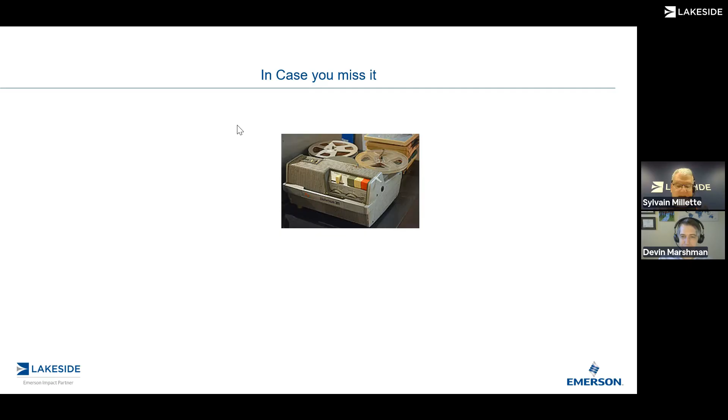Bit of a safety moment. I know we kind of passed the equinox back in March 20th or 19th, and we all survived here in Southern Ontario. We survived the eclipse, thank God.

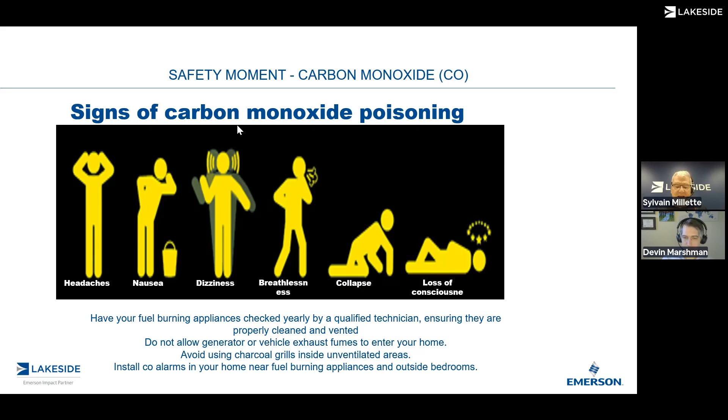One of the things to always follow: they always tell you to change the batteries for your smoke detectors, but as well as your carbon monoxide detectors. In my house, I have four carbon monoxide detectors, one on each floor including the basement, and one in the garage. It's important because I actually have my winter barbecue in the garage, so I barbecue in the wintertime with the door open, but I do have a carbon monoxide detector there as well, just in case. So be very aware of that.

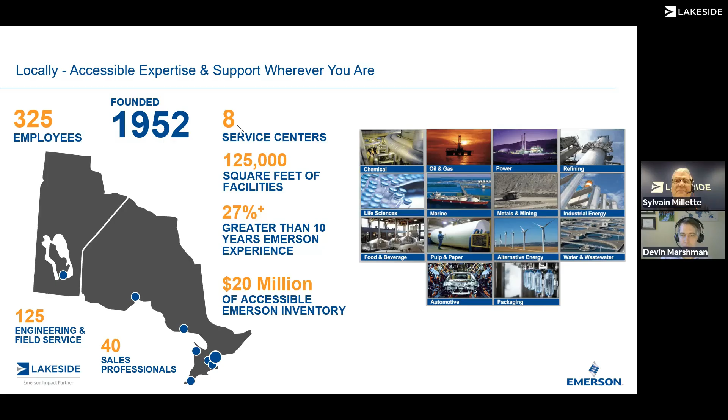It's a huge facility, 125,000 square feet - it's very big, I can't remember if it's in the millions or thousands. And we are part of the Emerson Impact Partner, as is Spartan as well. Our territory at Lakeside is most of Ontario, from just this side of Kingston to the Manitoba-Saskatchewan border and parts of Nunavut. Spartan Controls takes care of the western side from Saskatchewan to BC and most of the Northwest Territories. So we do work together a fair bit on some of these endeavors.

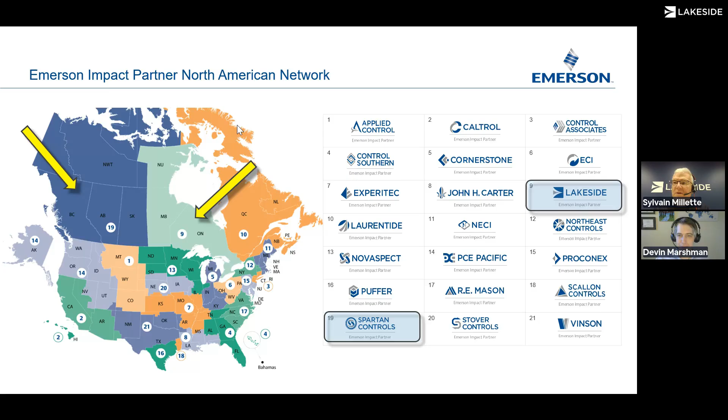So what are we going to talk about today? We'll explain a little bit the relationship - I've already hinted that we're both Emerson Impact Partners - and then we're going to talk about what advanced process control is, and most importantly, why.

We're going to deal with some of the applications that Spartan has developed, Spartan Pro Solutions, specifically grinding, flotation, and thickener. There are many other applications, but we've limited it to what I call the 80-20 rule - the bread and butter, where you probably get the most out of your money. Then we'll talk about specifics, and where to begin in terms of the opportunities available.

We'll talk about the timeline to actually implement these, and obviously the most important part - sustainability, how do we maintain the system to make sure it does not degrade over time? Yeah, sustainability, I know.

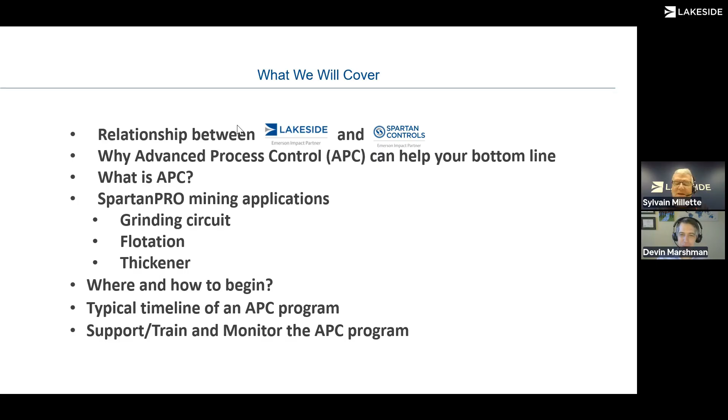As I mentioned, Lakeside and Spartan Controls are both Emerson Impact Partners. We are the exclusive reps for Emerson process automation products within our territories, but we also have an agreement together, so we rely on each other. Sometimes we have expertise that Spartan does not have, and Spartan has expertise that Lakeside doesn't have, so we lean on each other to bring more complete offerings to our customer base.

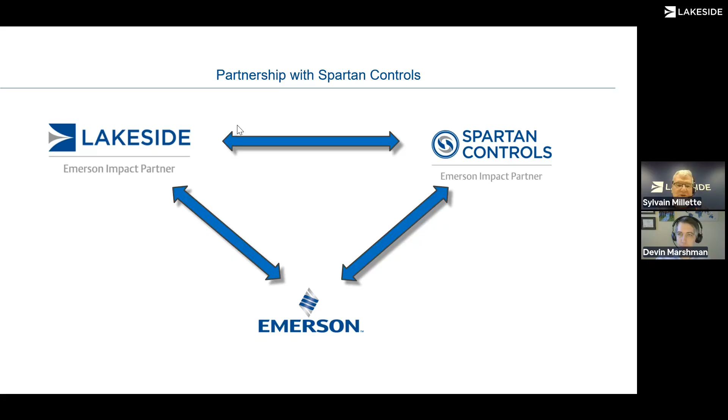For the Spartan Pro Solutions, today we're going to talk about the mining application, but there are Spartan Pro Solutions for all these industries out there - oil sands, which we don't have here in our territory, pulp and paper, the lime kiln application, power and utilities, and so forth. This is just a small subset of the solutions available to the industry.

So Devin, here's what we're going to talk about today - hard rock applications, so AC/DC or maybe Pink Floyd, a hard rock application. We've got Spartan Pro SAG mill - SAG stands for semi-autogenous grinding - and the ball mill. We've got soft rock applications too, and then more common applications, we've got flotation and thickener.

Today we're going to talk about these three groups of application. Devin, correct me if I'm wrong, but I think these are probably the most common for mineral processing. I'm not talking molybdenum or copper or gold or nickel, but these are the more common types for all mineral processing. Am I right in saying that? It definitely is in Western Canada. There are variations, lots of leaching and electrowinning circuits out there for sure, which we're not going to cover today, but we can be happy to talk about at a later date.

Now, Spartan Controls has a tremendous amount of experience here. So you can see it's a bit of an eye chart. But maybe Devin, I'll let you speak to this because obviously I'm not completely familiar here. I'll let you speak to this in terms of the benefits that have been achieved by advanced controls.

Yeah, you bet. So I won't talk about it line by line or anything, but really one of our mandates is to work with customers to set up advanced control applications that help their process and save them money, make them money, essentially. So we've been doing this in the mining industry for over a decade now. Most of these applications are kind of these big three that we're talking about today: the grinding circuit, flotation, and thickeners. But lots of other solutions in there as well.

Now, the exact values that customers are saving aren't listed here. Some of that's proprietary. The biggest application I'll mention, or the biggest payback that we've achieved for a customer, is upwards of $36 million a year. That's going to vary based on your mine size, based on your mineralogy, based on your current operating conditions and where you set the bar. But generally, there's some pretty high paybacks available for these applications.

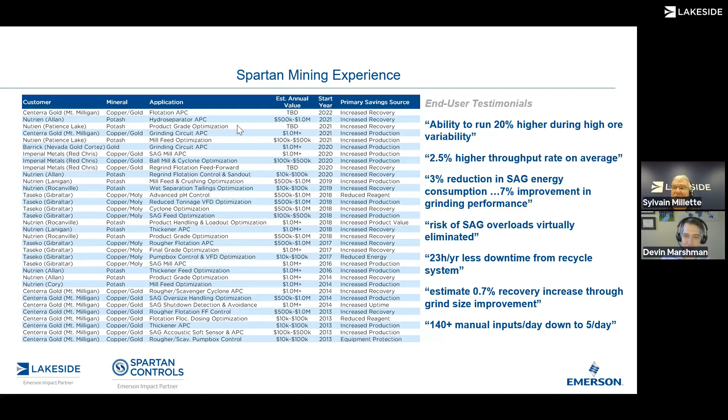And what's a sort of payback period from the moment of implementation, commissioning, and then operation, what kind of payback are we talking about? We're definitely talking months. So that's not years. And weeks in the case of, or days in the case of the $36 million - no, kidding, but it's pretty quick. That is amazing.

So why am I showing you these depressing slides? Well, basically, advanced controls is there - we'll talk about this a little bit later on - to be able to maximize your throughput, but also maximize your extraction of your process. So you get the best of both worlds to be able to weather these kind of fluctuations, which are inevitable for mineral prices as well.

Another reason why, at least in Lakeside's territory, here's kind of what we have right now: over 16 active gold mines, and one in Manitoba, and there are 13 more potentially active and in advanced exploration stage within the territory, and you can see the rest here. So the mining industry is huge, and we're not even talking about the Ring of Fire here, which is the chromite deposits up north, which are still happening. I'm not exactly sure where we are with that, but we're not even talking about it. So mining is a huge part of our customer base, huge part of Ontario's economy. Something that we need to make sure we capture and make sure that we are there to support and actually be as efficient as we can.

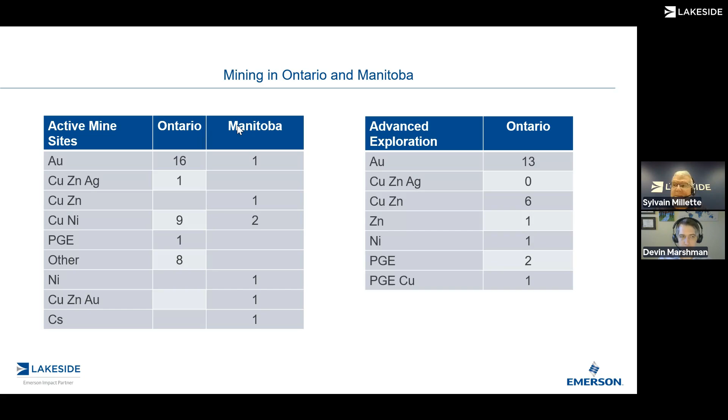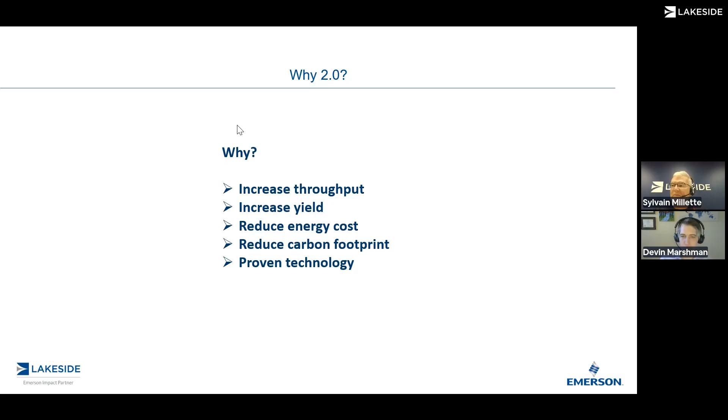Another reason, as I talked about, is increased throughput. So times are good, let's get the product out the door. Increase yield - times are not so good, but let's make sure we get as much as we can out of that. And energy cost, our favorite.

Last April 1st we had our carbon tax increase, which unfortunately was not a joke. Today, April 16th, we got the federal budget, all sorts of goodies in there. So obviously being able to reduce our carbon footprint is very important - the carbon tax, greenhouse gas emissions.

One thing I want to talk to you about, Devin, is the very last one - government incentives. So you've had some experience with government incentives. Can you say a few words about that?

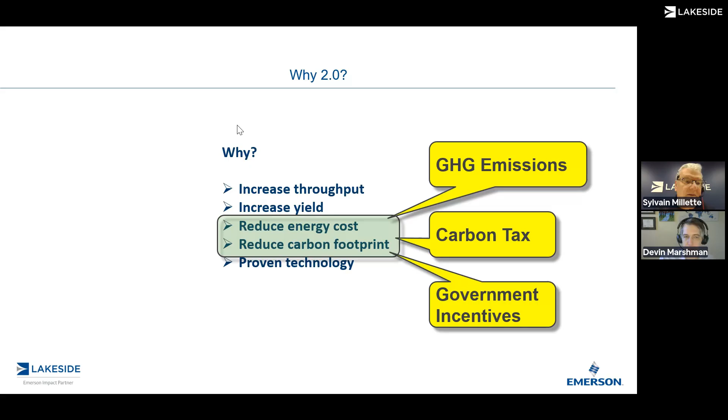We could have a whole webinar on that, but to keep it brief, there's lots of incentives out there around reducing energy consumption, specifically greenhouse gas emissions, both from provincial governments and the federal government. Across Canada, there's funding through NRCan, and for large projects that reduce greenhouse gas emissions, they can fund, depending on the application, 25 to 50% of projects. So not only do you get the benefits, but you can also get subsidies and help from the government. May as well get all the help we can get from our government.

Yeah, get that carbon tax back. Absolutely - we're not going to get on our soapboxes here, but...

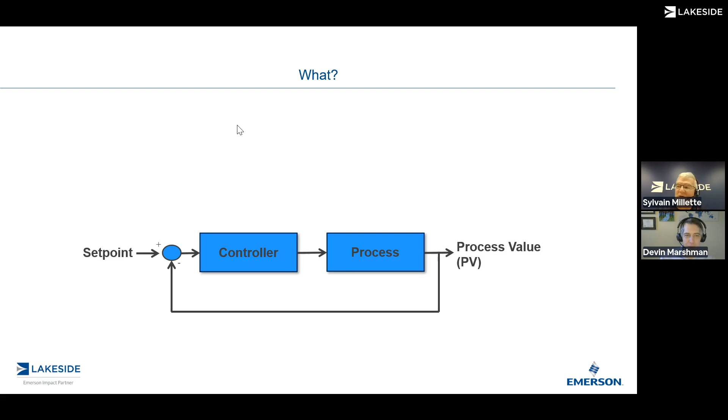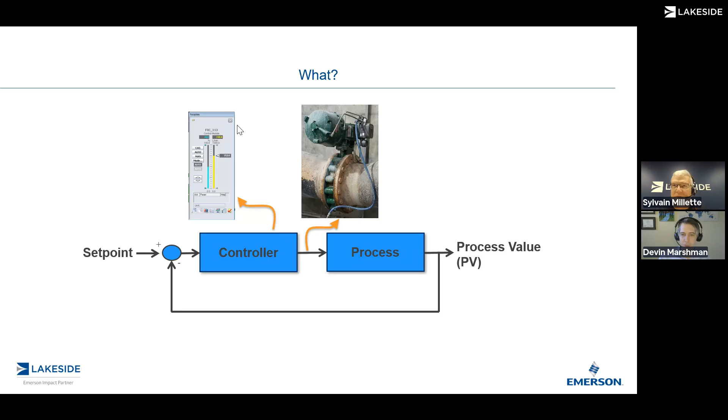Let's talk about, before we get to advanced controls, what simple control is all about. We talk about a single input, single output. We're all aware of our controllers out there - let's say we've got our flow controller, and the output of that controller will talk to a control valve of some sort. That will affect the process - could be a grinding mill, a cyclone, a flotation cell, all sorts of things. And eventually we measure what we need to measure - that's what we call single input, single output.

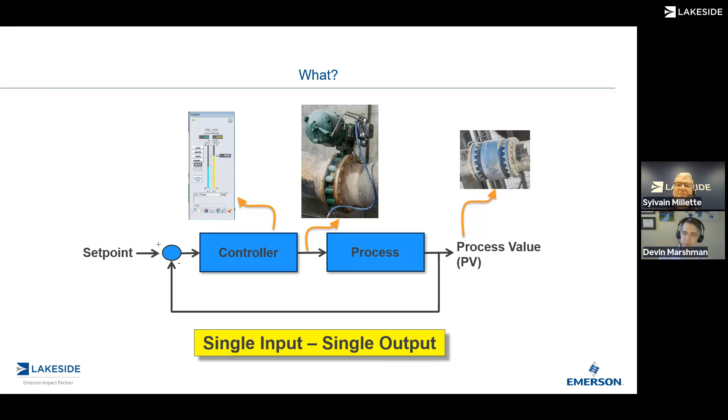Just bear with me for a second here - just had to clear my throat. All right.

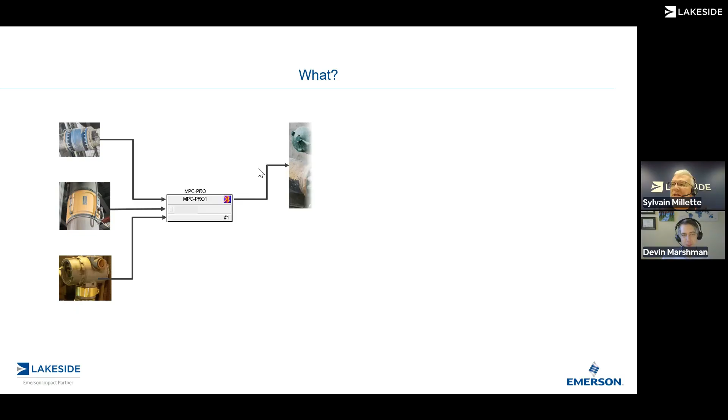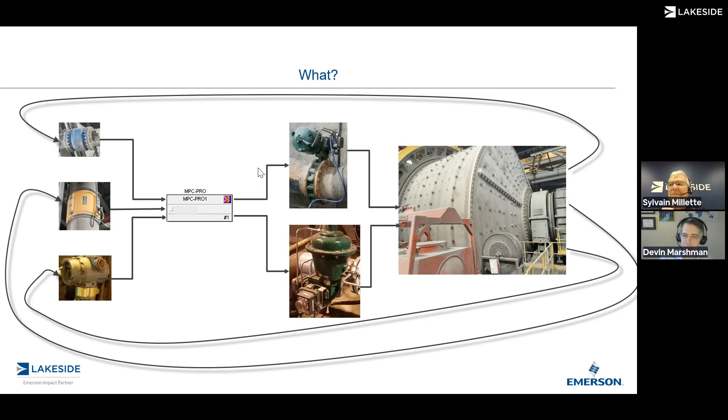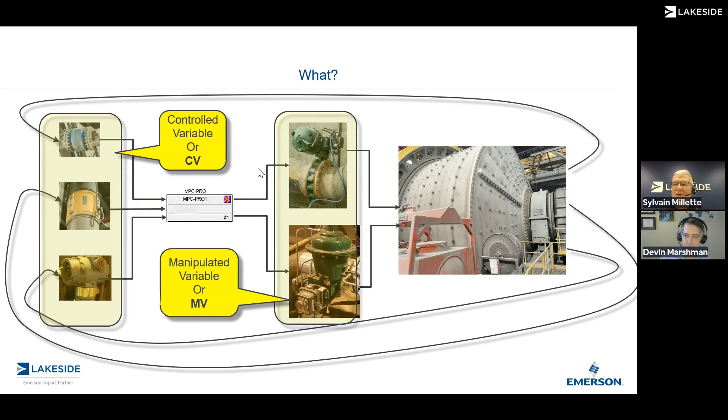So we've got multiple inputs - you can bring in several measurements, and that block can talk to multiple outputs, multiple valves, which will then affect your process, and everything comes back. The key here is nomenclature: before we talked about process variables for single input, single output control. Here we're talking about controlled variables - what are we trying to control, what are we measuring. And the MPC Pro talks to the outputs, known as manipulated variables.

What makes the MPC special is that it can take into account different interactions. So if I'm moving one valve, it may affect a couple of process measurement control variables, and it can account for that interaction - whatever control action it takes, it can take the equal and opposite reaction to minimize interaction with other variables.

It can also take into account disturbances - other measurable disturbances, basically like feed forward. Something happens, and we understand that when this other thing happens, it affects us - therefore if we measure that, we can compensate for that disturbance coming through. It also accounts for constraints, so we don't go above or below certain conditions.

It can also take into account long process dead time. For a PID controller, dead time or time delay is the enemy of the controller. This is a good dead time compensator that accounts for a lot of dead time so it doesn't overcorrect - it builds some weighting in there. Essentially we're building a model inside the controller which accounts for that in order to compensate for any kind of time delays.

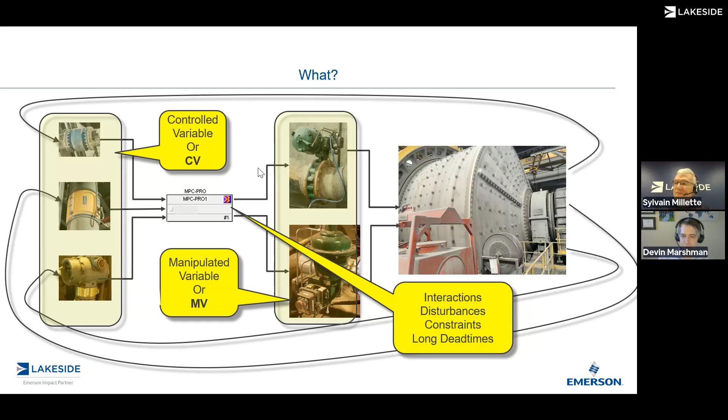So a little bit more, and then obviously you get to understand, get to talk to the really smart guy here, Devin.

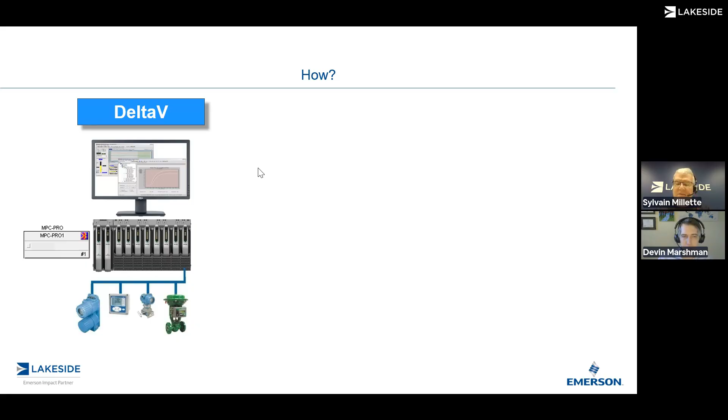But so how do we do this? Essentially, if you have a Delta V system, and I know you don't all have a Delta V system, the MPC application runs native within the Delta V environment. It actually executes natively inside. It's a pretty open box. I've actually been playing around with it, managed to get everything going within a day and a half, without any training. So it's very flexible, very open, very easy to use.

Now, obviously, what if I don't have a Delta V? Well, we can still implement this application within a PK controller or whatever technology and communicate via OPC UA.

I don't know what UA stands for, Devin. Didn't you know? Oh, no, I'm not sure. Ultimate access. We'll just make something up. Yeah, so OPC, right. UA, LA, SPCA, who knows?

But basically through OPC, you're able to communicate with your controls, be it a PLC, be it another DCS, and things like that, and communicate back and forth. So it's not the end of the world if you say, well, I don't have a Delta V system, it's not the end of the world.

Now, I know you guys at Spartan have done this a fair bit, not just in the mining industry, but throughout many industries. Do you have an idea how many systems you've done this with? We've done it on roughly 10 sites, and within those 10 sites, we've done about 30 applications running on Delta V on top of other systems, and those other systems range from Foxboro, ABB, Honeywell, you name it, Rockwell. Now, they're not all mining industry, but the concept is there, it's very applicable and very feasible.

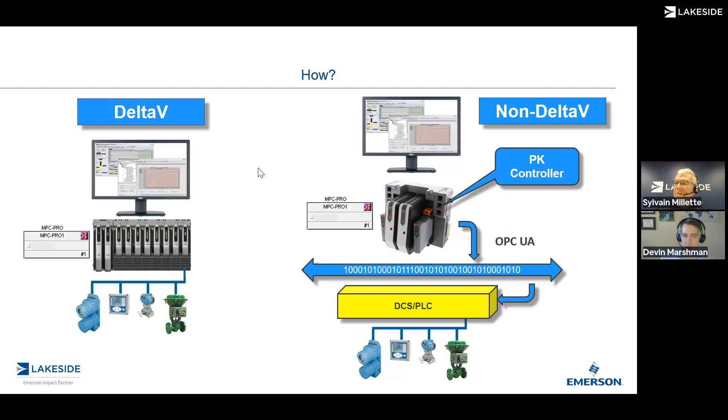Yeah, exactly, layering on Delta V for the advanced control functionality. Okay, one last thing, but like I said before, we get into the really interesting stuff here, and I'll get on my soapbox a little bit when I talk about loop tuning.

I talk about loop tuning in my courses that I teach. The first thing I say is that loop tuning is the last thing you do, which is kind of ironic, because the first thing we need is a proper process design. Make sure the pump sizes, the tank sizes, line sizes, grinder, flotation, all that, is properly designed for your process. If we don't have a properly designed process, we're not going to be able to control it.

Next thing on top of that is control strategy. How is it programmed within your control system? Do we have feed forward control or not? Do we have MPC control or not? Or have we thought about doing MPC control?

After that is instrumentation. On one side of the equation, we've got to have the right instrument properly specified, installed, and maintained. I'll repeat it: specified, installed, and maintained. If we don't have that, we're not going to be able to control properly. And on the other side of the equation, you've got to have valves that are precise, dynamic, and properly sized. If we don't do that, we're not going to be able to control.

Now, typically here, I would say after that, loop tuning becomes effective, but we could carry it one step further, because only then will advanced control be effective. So our approach will always be a bottom-up approach. We're not going to tell you, hey, we're going to slap on some advanced controls on your system and everything's going to be better. No, we're going to have to do our due diligence and make sure all that is done properly. And then we'll say, okay, now let's talk about doing some advanced controls.

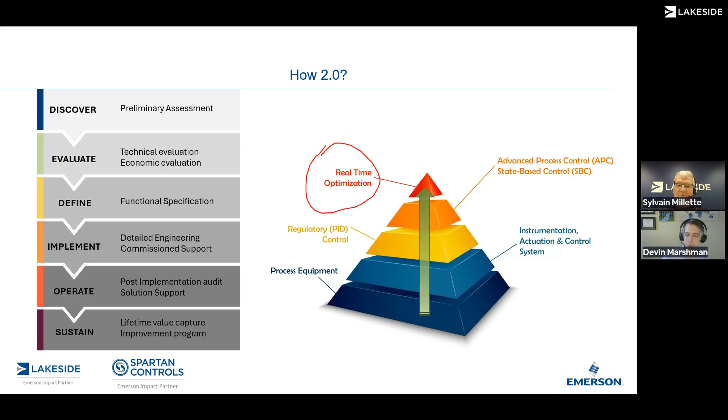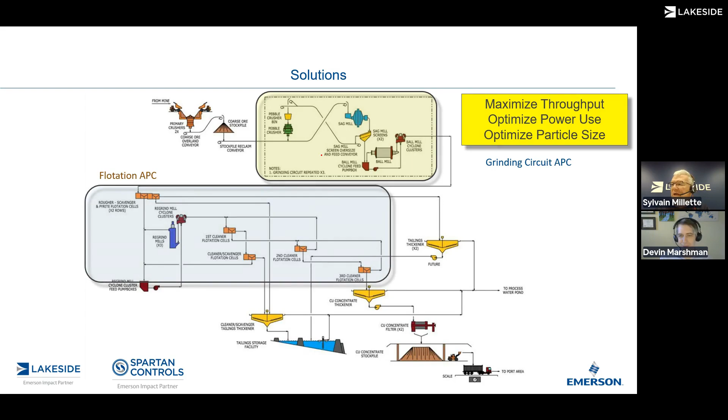So there we go. Here, like we talked about, we're going to deal with the grinding circuit. I'll talk a little bit through this. So, maximize throughput - obviously all these objectives - we're going to deal with flotation as well as the thickeners. Maybe what we could do is just go right through here, and then I'll be quiet and let you take this over, Devin.

Yeah, and I'll just add, that process flow diagram is a typical one for copper sulfide processing. I realize all of the processes out there are probably going to vary from this, some to small degrees, some to large degrees, but we're using this as the standard benchmark to walk through.

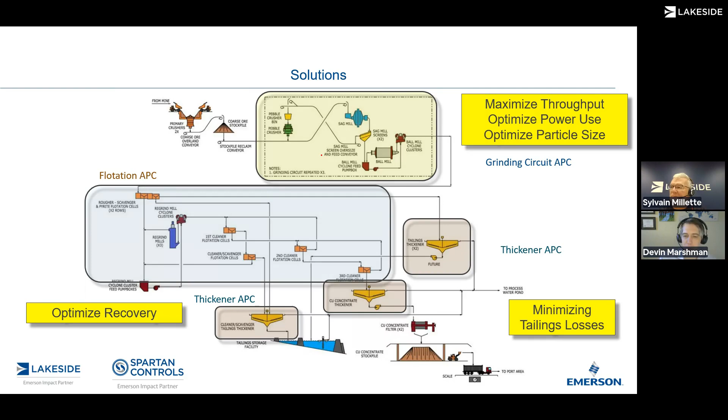So starting with the grinding circuit, this is right at the front end of the mill and is responsible for getting the particle size ground down to a level where you can actually process it or separate it within flotation. A lot of the time there are different configurations, but a really common one for hard rock metal mining is to have a SAG mill followed by a ball mill grinding circuit. So SAG gets the particles down to a relatively fine size, and then the ball mill takes them a little bit further.

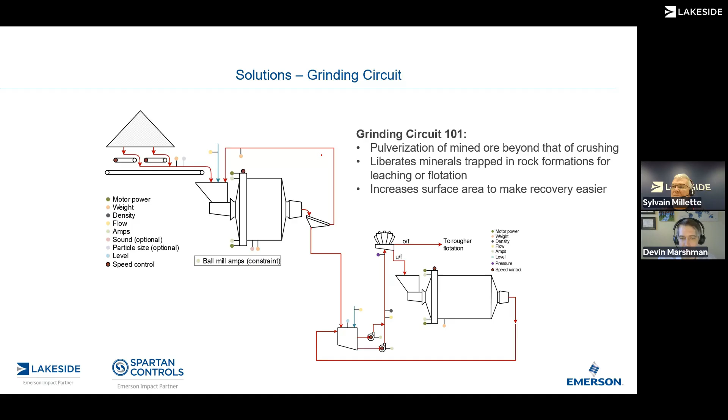It's really about efficiently grinding down those particles to an efficient size. So when we're talking about advanced control, we're typically trying to maximize throughput and minimize power use while maintaining that grind size. Looking at the SAG mill, it's one of these multivariable applications, like somebody was talking about earlier. So there's not just one handle that you can manipulate to try to control grind size or loading in the SAG mill or power draw in the SAG mill.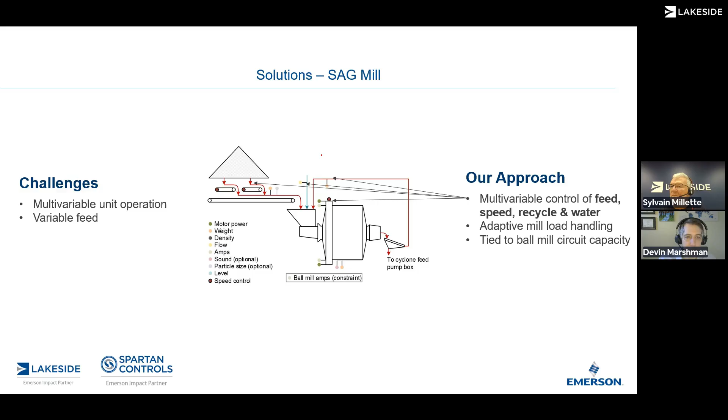Really, if we're going to operate this, you're controlling feed rate, you're controlling speed of the SAG mill, assuming there's a VFD on it, which there usually are in large operations. You're controlling the recycle rate and water addition in there. So any operator looking at this has to coordinate all of these things and manage them together to maintain a stable density within the SAG mill, a load in the SAG mill, grinding efficiency, and setting up advanced control - we have to consider all these things as well.

One key point here is that autogenous term in SAG mill, like Sylvain was referring to, really comes from the idea that you're smashing rocks against other rocks in here. So basically what you want to do is load the mill up and rotate it so that the rocks get up as high as possible in the SAG mill and then come crashing down into other rocks.

Now there's metal balls in there as well that do this, which is the semi part in SAG. But basically, if you underload the mill or spin it too fast, you're going to end up taking the rocks up higher and hitting the liner, which is really detrimental and can increase the wear of the liner, significantly reduces grinding efficiency, and takes more power.

If you overload the mill and fill it too full, slamming rocks down into other rocks isn't very effective - you don't grind it enough. It's a bit of a self-fulfilling problem, because material isn't getting ground and exiting the SAG mill, and you just build it up and run into these overload conditions. So in addition to coordinating control, you have to manage these kind of abnormal situations.

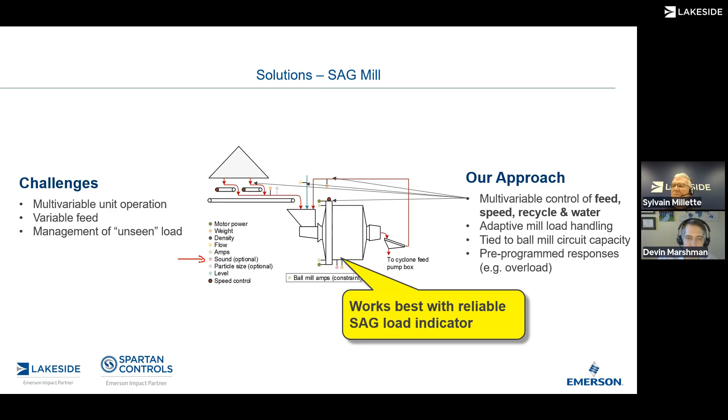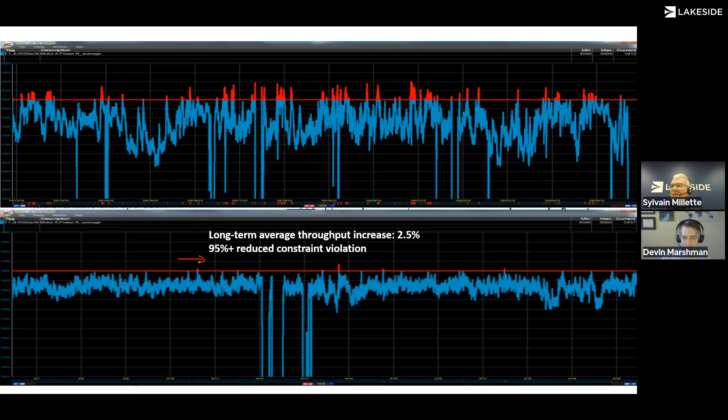This is a nice, clean snapshot - your classic optimization of tightening up your variability and then shifting your target one way or the other. That one's worth millions of dollars.

Let's talk about ball mills here. So ball mills are downstream, usually get ignored because of SAG mills, but they definitely have to be considered within the same strategy. Depending on how hard you're running the SAG mill and how efficiently you're grinding in there, you can put a lot of load on the ball mill circuit. So really what we're looking at here is how much load is recirculating within the ball mill.

We want to run that as efficiently as possible and make sure the cyclones are doing a good job of separating - so control density and pressure based on the number of units open. But another key piece is that if the ball mill circuit is getting too overloaded and there's nothing we can do about it, we need to cut back on the SAG mill to prevent having to stop everything and dig out the ball mill. That's another key piece of maximizing throughput there.

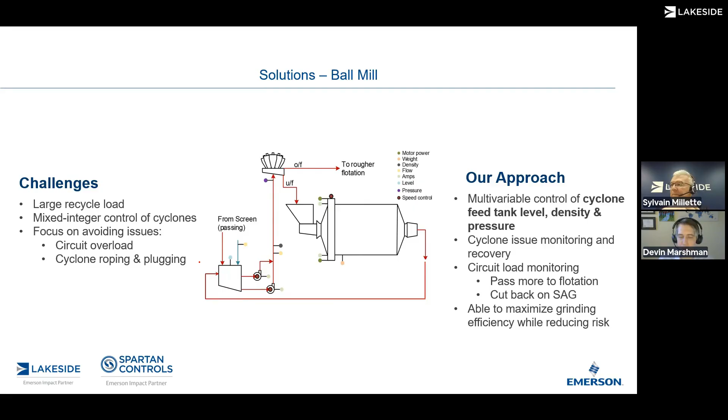So the two would be coordinated together then, right? Absolutely. Let's talk about flotation here - maybe you can describe a little bit what flotation is about and how we can help.

So basically in flotation, you're getting the feed right from where we left off, coming off the cyclone overflow from the ball mill circuit typically. There are many flotation cells - I'm usually talking about roughers here, but there's cleaners, scavengers, regrind, tailings throughout the circuit. Either way, they're getting the feed, and they're applying a surfactant to that feed. That surfactant is designed, depending on the mineralogy, to bind to the desirable material and make that material hate water.

It will make it hydrophobic, so it basically wants to get away from water as quickly as possible. We put it into the flotation cell and pump in small bubbles of air down to the bottom. Those bubbles rise to the top, and the hydrophobic particles that want to get away from the water see their opportunity and bind to the air. The air floats up to the top and carries over those desirable materials with the surfactant applied through these concentrate launders.

Whereas the undesirable material, which hasn't had surfactant applied, is happy staying in the water, so it exits via the underflow. So there's one stream in and two streams out, plus the air. And I should note, these can be reversed - you can add surfactant that binds to undesirable material and float that instead, but typically it's the desirable stuff that's being bound.

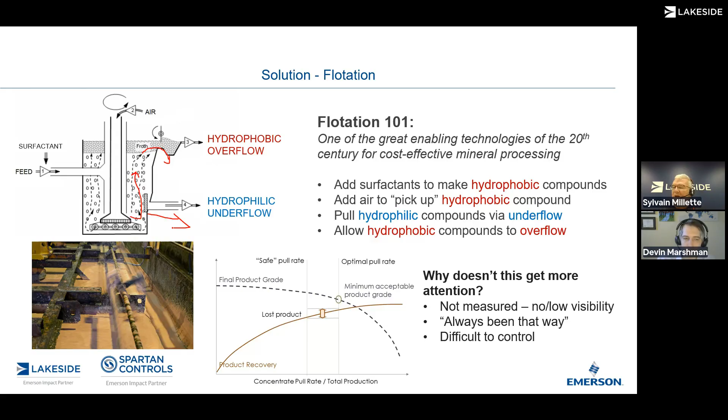So being able to actually control that pull rate. The best thing somebody could do is tell you the rougher looks the way it ought to look, then take a good long look and try to keep it that way.

So this is kind of old school, right? You've got an operator with a lot of experience who looks at it and says, 'Yeah, it looks good,' or 'we need to add this, we need to add that,' and that operator knows how to operate it. But then you get the next shift, a different person with different personality and different levels of experience, who may not know as much or may operate it differently.

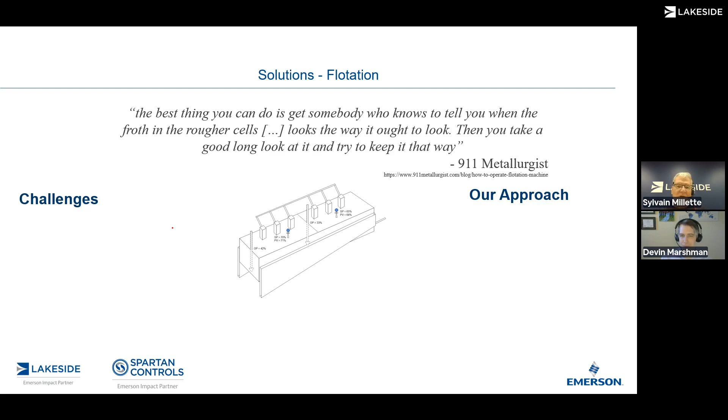So we're kind of looking at a 'look and feel' kind of deal. What we're trying to do here is have a consistent, scientific operation.

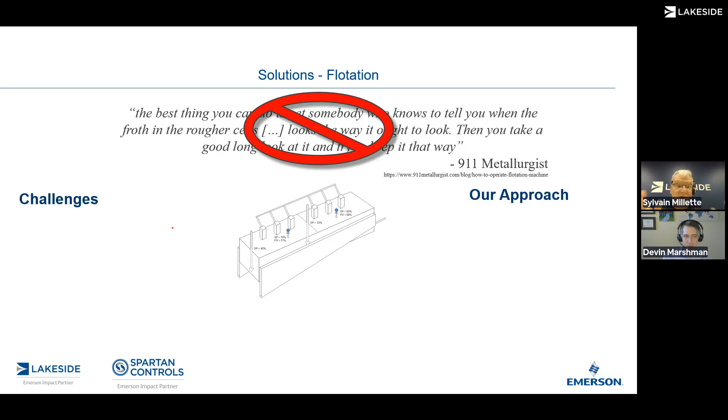I kind of equate it to making chili versus baking bread. When you're making chili, you taste it one day and it's good, but it's never the same. But when I'm baking bread, I measure everything down to the gram level because it's very sensitive, and I want to make sure I make a good loaf of bread every single day. So I have to measure, be scientific about it. Maybe it's a bit of a hokey analogy, but go ahead, Devin.

No, it's a good analogy for sure. There are operators and metallurgists who can do this super well, but they're not standing in front of the flotation cells 24 hours a day. So our philosophy, coming into this and designing it about a decade ago, was that there's a better way to do this.

Now, flotation is an under-constrained system, and I want to talk about this a bit because it's an important core concept in how we're approaching control. Really what we're trying to control is the pull rate of concentrate over the top—how much of that product stream is going into the overflow launder that exits.

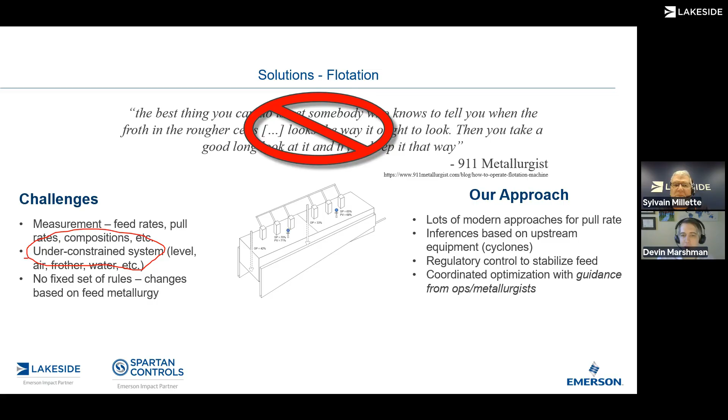But there are lots of ways to control or adjust it. You can increase the airflow, increase the level in the cell by closing off the underflow valve, add more frother, and in some cases dilute the feed stream coming in as well. So there are many ways to make the level or pull rate go up or down, depending on whether you want more or less coming over the top.

Now, typically an experienced operator will move all of these things together, because you don't just want to pick one and only use that one thing to try to control.

If you're using frother, for example, adding a little bit more might get you a little bit more recovery because you're binding to more of the product, but you're eventually going to reach the point where you're saturated on the amount of frother you can add, and it's essentially wasted, or it starts binding to undesirable material and floating that over the top.

Likewise with air, if you increase the airflow rate a little bit, you start to make more bubbles and send more over the top. But if you send too much air, you essentially start to boil it, or it looks like you're boiling it rather than increasing temperature. It gets so volatile that it pushes undesirable clay, dirt, and stone over the top, and you end up with an undesirable situation.

So what you want to do is move them all sort of together. Now this is going to vary from process to process, and it's going to change based on the metallurgy at site and the specific composition of what's coming in, what the inerts are, all that fun stuff.

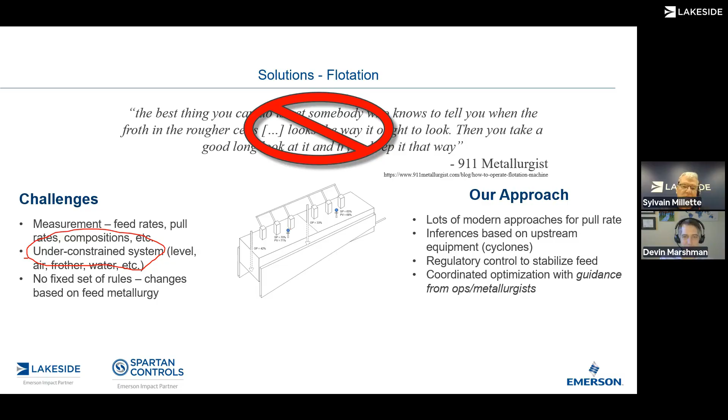Absolutely, yeah, you can. Awesome, all right. So okay, go ahead Devin, let me go back here, go ahead and talk about this.

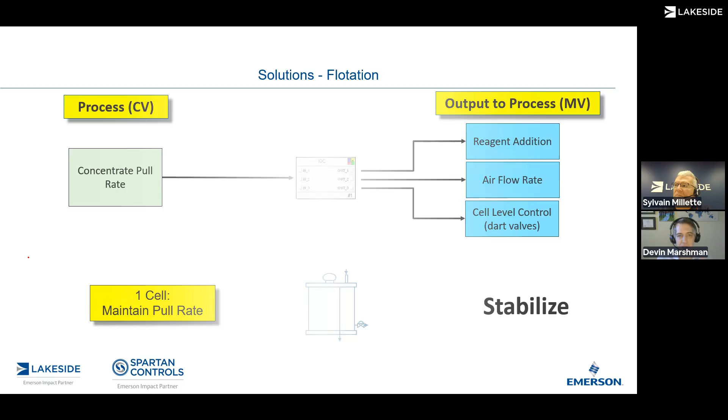IQC is our solution to this under-constraint problem, and it stands for integrating quadratic control. It's essentially designed to look and feel like PID control, but for these under-constrained systems where you have multiple outputs. So instead of having one gain, rate, and reset, you'll have multiple gains, rates, and resets. Basically it'll do PID control, but then split the output between the three signals depending on where they are within this kind of optimal operating envelope.

So what we get operators and metallurgists to do is set high and low limits for where the process should be running under normal conditions. Again, this will vary site to site, and it'll also vary week to week depending on where the ore is being supplied from and what that feed mix looks like and what's going on upstream - maybe a couple of cyclone units are down, so you're getting coarser material than you're used to.

So basically operators and metallurgists will be able to go in and define these upper and lower limits. Then depending on where those variables - airflow rate, level, and water/reagent addition - are within those limits, IQC will coordinate them and move them together so that they're the same distance from the upper and lower limits at any given time.

Okay, interesting. So it kind of finds its place based on the setting. Obviously there must be some sort of lab testing done by the metallurgist, probably on a daily or weekly basis, to adjust these limits over time as the grade of the ore changes.

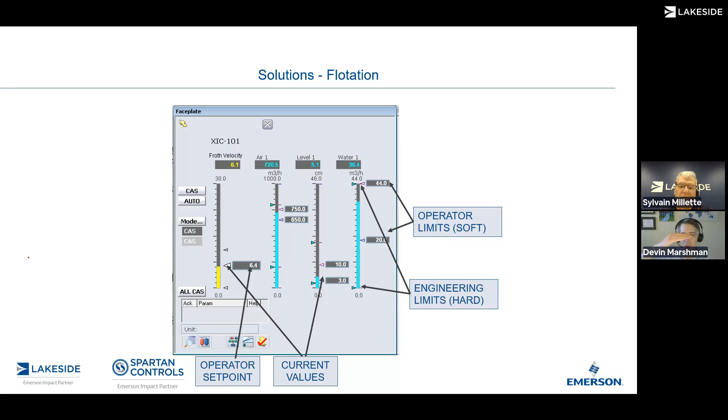Correct? For sure. The challenge is that a lot of that stuff isn't measured in line, definitely not at each flotation cell. So if it were, we could tie that back and close the loop around some of these upper and lower limits. But for now, customers have had great success just setting the boundaries for the process and allowing IQC to control it through upsets and changing feed conditions to provide consistent, stable operation.

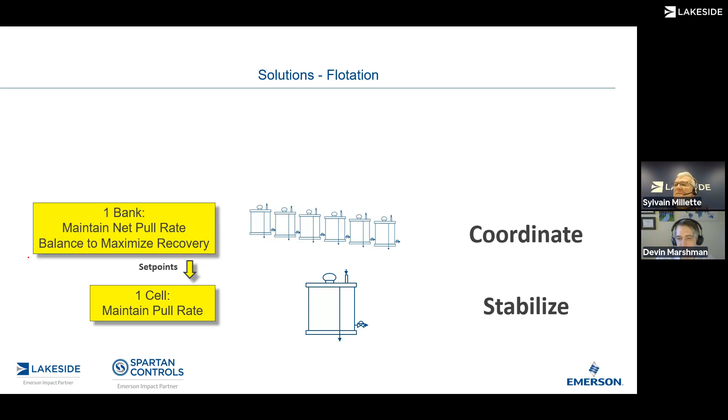Continuing on, I was talking about control of a single cell, but usually these cells occur in banks, so there'll be 6 cells in a rougher bank or 8 cells. Really what you want to do is not just control individual cells, but control the net pull rate off of the bank. So here's where the next step in IQC comes in, managing these cells all together to control the net pull rate off of the bank, again with IQC.

There's multiple ways to achieve it. We could pull it all from the first cell, or all from the last cell, but really what we want to do is evenly and consistently split how much we're pulling off of each cell to maintain stable operation. So each cell will have its own IQC controller, and each bank will have a supervisory controller in charge of coordinating them.

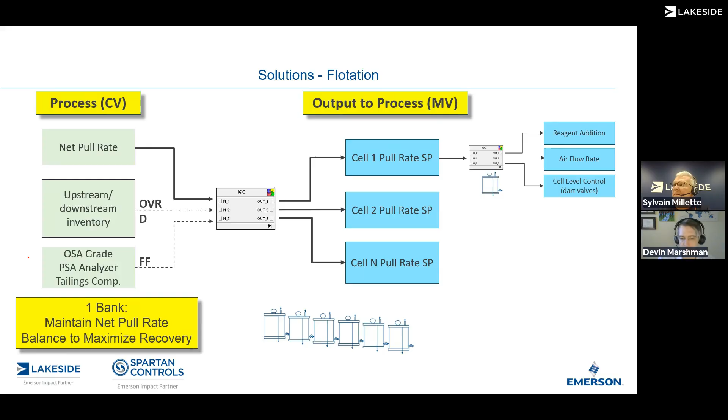Wow, okay. Then there's one more level on top of that. You don't just have your roughers - typically you'll have your roughers, scavengers, cleaners, and tailings flotation banks. This is getting to that real-time optimization supervisory level, where we want to coordinate all of those together to make sure we're pulling as hard as we can off the right locations and controlling to the final product grade specification.

So we want to meet the customer or selling requirements for the final product, but get as much off as possible. Typically, if we want more product, we'll pull a little harder on the roughers rather than the tailings flotation, because that won't get you more bang for your buck. There's a bit of an art in splitting that, and for that we're going to use IQC one more time to coordinate.

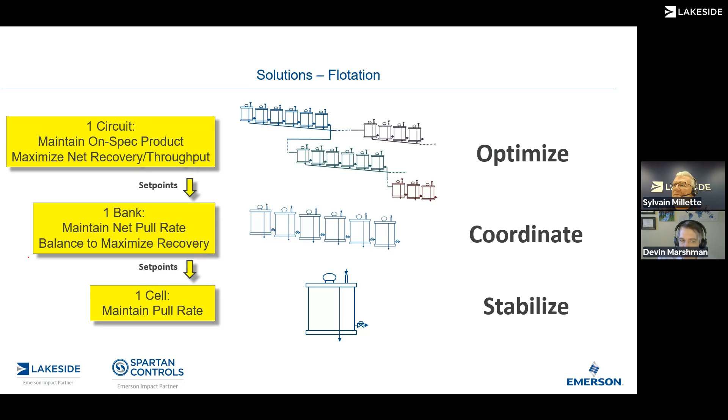If you go to the next slide, Sylvain - click one more time there - it'll coordinate how much you're getting off of each individual bank. Again, we'll have the metallurgists and operators set limits for how much you want to pull off of each one. Then the IQC solution will manage disturbances coming from the grinding circuit and from changes in feed conditions, reacting to those to keep things stable while making sure we're hitting but not exceeding our product grade.

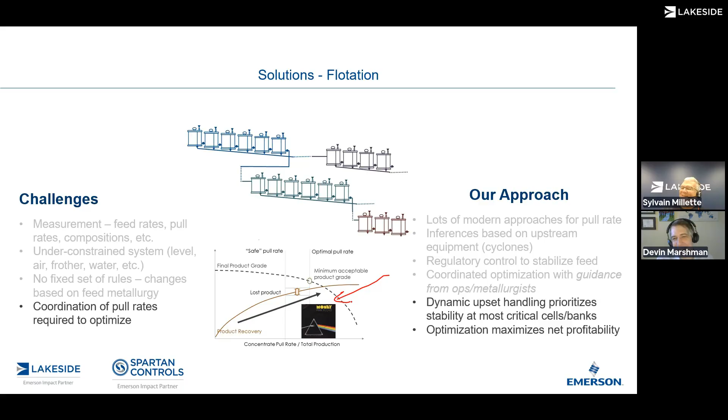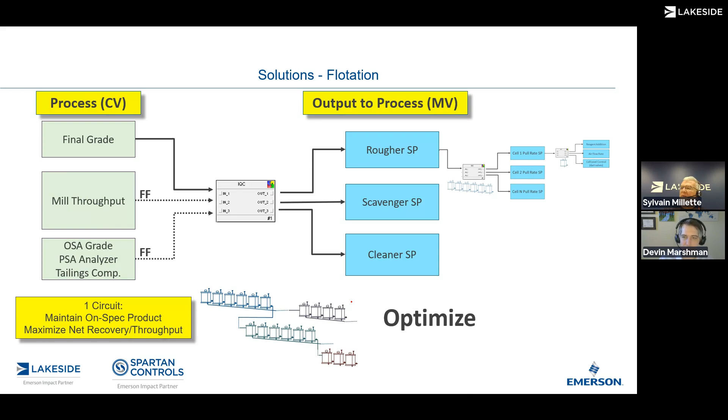This is really where you get into the money piece, because that's full circle, right? Yeah, exactly. So really we want to make sure we're pulling as much as we can while hitting that final product grade - this is what that strategy looks like. So there's a coordinated approach all the way across. That's impressive. We've had a lot of success setting this up across all the flotation banks on site to control final product grade, with nice, easy to understand user interfaces and pretty substantial returns.

It's really tough to measure how much benefit you're getting off of flotation, because there's so much going on and you're not typically measuring concentrate off of each cell or bank - you only really measure final product grade and tailings grades. But in terms of quantified benefits, this customer was able to isolate a 0.74% recovery increase just from implementing flotation control. The reality is there was significantly more than that, but there was so much else going on in the mill at the same time.

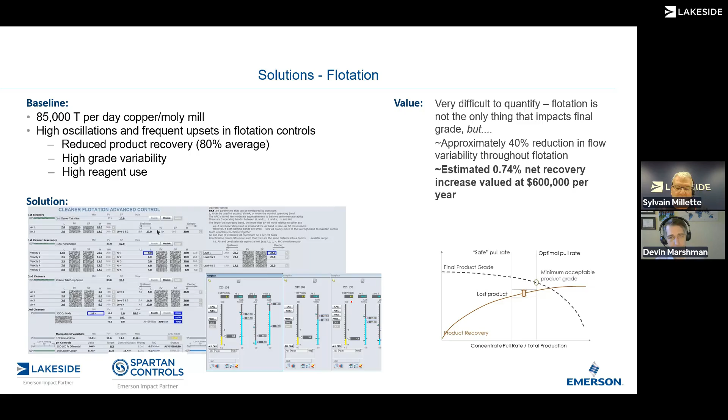Exactly, there's so many ancillary benefits just from steady operation - it benefits upstream and downstream operations, and obviously that particular operation too. 0.74%, that's all, some of you might say that's not a big deal - but it is a big deal when you're dealing with millions and millions of dollars passing through, and thousands of dollars an hour of operation time. Absolutely.

Then you're paying to process that ore anyway, so it's really just the low to no cost ore except for the shipment. Yeah, exactly that.

So let's talk about thickeners. What does a thickener do? There are multiple roles for a thickener. It can be used in multiple locations. There's a middlings thickener used to separate more solids product in the middle of the process, and both streams will go to different flotation cells.

There are thickeners in potash used to recover product. But I'd say the most common ones are tailings thickeners, where you're trying to maximize the density of that tailings and minimize the total volume you're sending out, so your pond doesn't build up as much. But really, all thickeners have the same fundamentals. It's just a big settling tank with a really large volume and residence time, where you're pumping a slurry in and allowing the solids to settle out the bottom, thickening the product and clarifying a liquid over the top to recover and reuse.

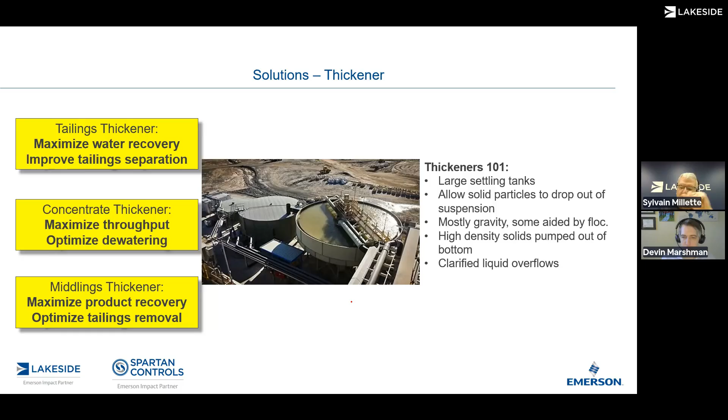And I guess the idea is, especially on the tailings side, you don't want to be outputting water. You want to conserve water and be more sustainable. There you go, I got to say it again. I think I have to say it 2-3 more times before the end of this webinar, otherwise I don't get paid.

What you want to do in a lot of tailings situations is maximize the density of that slurry going out, up to the limits that your pumps can handle. That can significantly prolong the life of your tailings ponds, along with the sustainability benefit of recovering more water and having lower net cost of operation.

The challenges here: it's a simpler control setup than flotation and the grinding circuit, except it's super slow. Making a change, because it has such a huge residence time, can take 2 to 3 hours to settle out. So it's tough for someone to remember what they did 2 to 3 hours ago, let alone shift changes and coffee breaks, where someone makes a change and takes off, and then someone new comes in and can't figure out what's going on.

So this model-based controller, MPC, does a really good job with these slow-moving, long time delay processes, because it has an embedded model of how the process reacts. It'll make a change and then know to wait 2 to 3 hours to see the full response, whereas PID looks for that full response right away and keeps winding up until you get it.

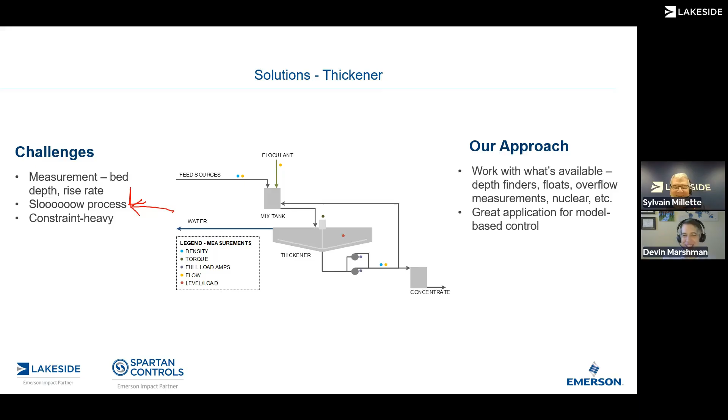Exactly, and human controls were even worse. We want it done yesterday as opposed to today. It's really a non-causal system. I'm not trying to rag on operators at all here, it's just difficult to be patient and wait.

There are manipulated variables we can add depending on your setup. Some will have recirculation lines with variable flows so you can get down to lower flows and higher densities. If there's very few solids in the incoming stream, sometimes there's reagent addition or water addition on the inlet that we can control as well. But usually the main control loop is pretty straightforward, trying to control underflow density by changing that underflow pull rate.

Now, there are definitely constraints in there. One thing you want to watch for is not putting too much load on the rake. There's a big rake that rotates around the bottom of those thickeners. It's very sensitive, it's a really long rake, so any sort of tension, especially near the end of the rake, can break it. And those are very, very expensive, seven-figure downtimes.

So you don't want to, and you can't, it's a critical part of the process. You can't operate without it, and you can't bypass it either, or you'd fill up your tailings ponds pretty fast.

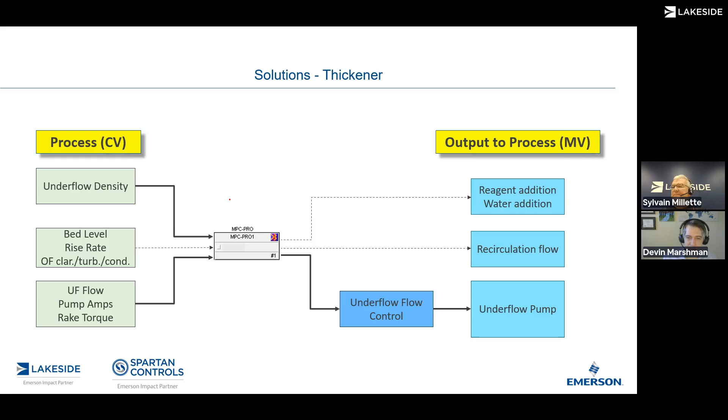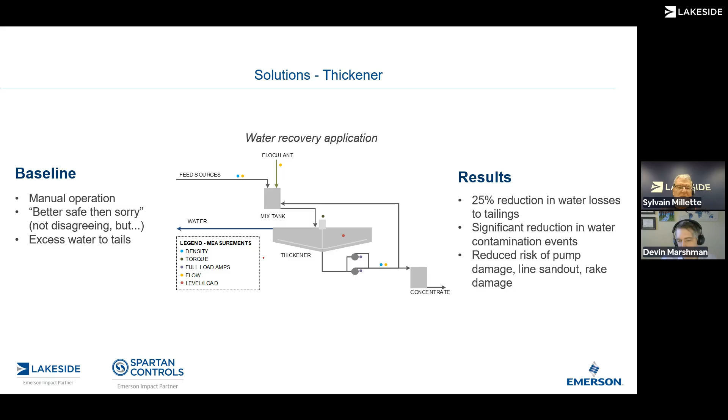Pretty darn fast. Sure, interesting. So again, lots of different applications for thickeners, lots of different locations, but we can do a significantly better job of controlling depending on where the baseline is. Usually lots of benefit in there.

In non-potash applications, this would be water. Hugely beneficial still, maybe not as much money since it's not product, but lower volume to the tailing pond, higher water recovery, and water is becoming more and more important, getting a bigger focus.

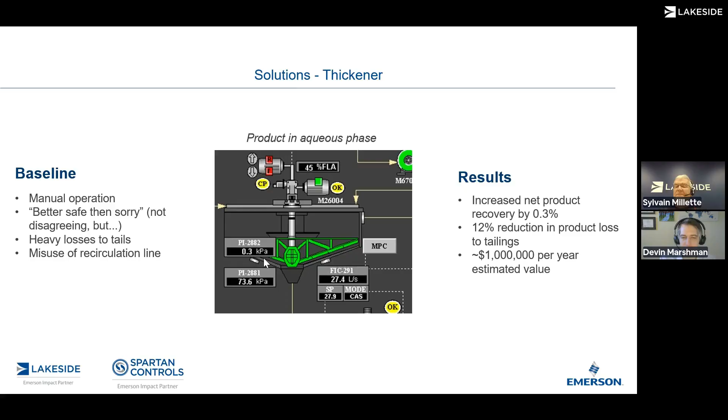Because of sustainability, I'll help you out with the quote. Sustainability - well, we talk about potash here. Obviously potash is used as a fertilizer, which is used to grow more food, which is making things more sustainable. So it kind of fits in now, right? I think I said it three, four times. I might have to say it one more time, and I think I'm okay. All right, let's see if we can do that.

There are other applications here. I mean, those are the big three, from what I would say, right now, but there are other applications here. So maybe you could talk a little bit about these other applications that are available as well.

Yeah, we have a ton of applications out there, and we could spend a whole webinar on each one of these. pH control is a huge focus and importance in the chemistry, especially in flotation in some circuits. Precise flotation control can have a huge impact on recovery. Pump box level control sounds like a pretty basic one, but it has a huge impact on mitigating disturbances and dampening them, protecting downstream processes.

And that's always a big challenge, stabilizing the entire thing. And then again, leaching and electrowinning - for circuits that have those, they typically won't have the same grinding circuit flotation setup, they can have leaching and electrowinning instead. That can be a major factor, especially depending on the mineralogy and what you're trying to recover, but especially in the gold industry.

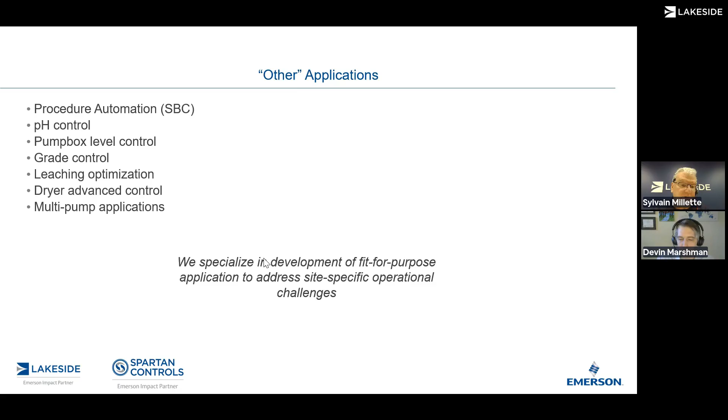So if any of you out there are interested in some of these applications, reach out to me, and we can arrange something special if you want to know more about that. We can certainly arrange one more presentation on that specifically if you're interested.

So okay, we're all excited now. We're all gonna do this. Yeah, I want some advanced controls. I want to be able to... I want my mine to prosper and so forth. Um, where do I begin?

So here, I guess we're going to begin with what's called a feed study, front end engineering design, and maybe Devin, you could talk us through this time chain here, time events.

Really what this is all about is making sure that we're not taking a generic solution and just throwing it in everywhere without changing anything. We want to make sure it's fit for purpose and it's going to address the specific challenges that individual operations face. Depending on whether a mill is throughput limited or trying to optimize power generation can make a huge difference. Depending on whether they have multiple crushers upstream or they're just getting raw feed, that can make a huge difference. So the front end engineering design phase allows us to sort out those details, make sure that foundation of measurement and actuation is in place, also to support effective control, so that when we get onto the design and implementation of control, it's set up for success, and it's meeting the specific needs of the site.

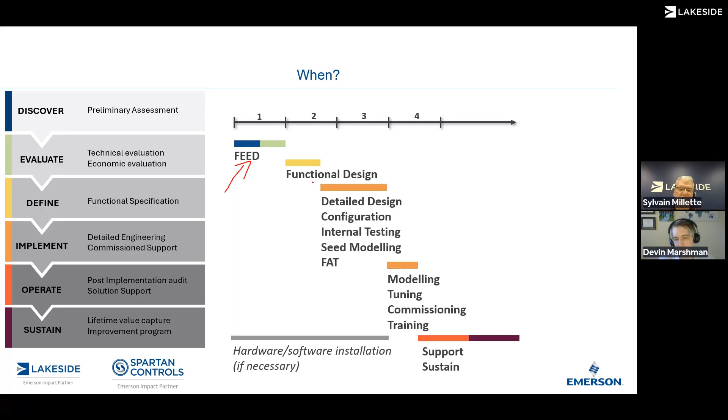So in terms of timing, I see 1, 2, 3, 4 at the top there - I guess those are months, that time frame. Under a year that we can expect from conception to implementation and commissioning. If you're talking thickeners, it can be shorter than this. If you're talking about optimizing your entire flotation circuit, it's probably going to be drawn out a bit more. But this is a decent scale for sure.

Okay, I got to say it one more time. Okay, everyone - so now to be able to sustain this application. There you go, I think I'm okay now.

Obviously you need support - you can't just let it run. Processes change, equipment wears out, things change throughout your operation, your production rate changes. So it's important to be able to continuously monitor the performance of your controls, otherwise it's going to flounder and degrade slowly, and then it's usually the kiss of death. It's really about staying ahead of that and being able to see things taking a turn before they get too bad.

Usually one of those first signs is just utilization of the controls. If you see utilization dropping from 95% to 75%, that's your cue to go see what's going on. It might be a piece of equipment that's changed and needs retuning, or a measurement going bad that needs calibration. But it's a sign to get on it. So the sustainability process isn't that intensive, but it needs to be done - it needs to be intentional and a little bit proactive.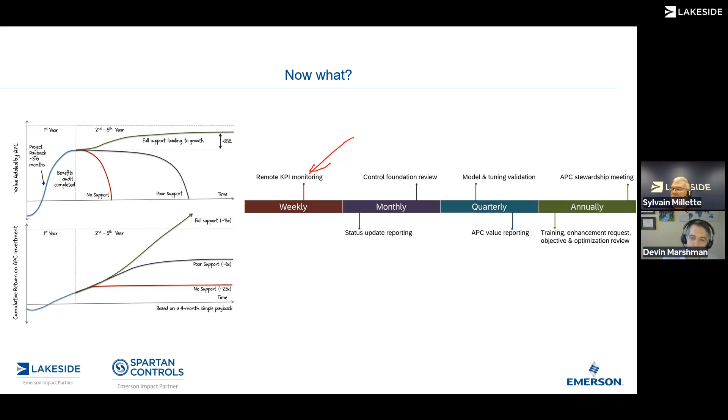Otherwise, like I said, you'll just like that fish, you'll flounder. Yes, I know, I got terrible, terrible jokes here. There you go.

Typically we'll go to a site and they may not know exactly where they want to start, or they may want to look at flotation, thickeners, and the grinding circuit among other processes, but not really know which one makes the most sense. In that case, we can do a bit of a study up front to see what the payback would be on each of those, see which ones are most ready for advanced control, look at the state of the measurement and actuation, and really see where we can get the most bang for the buck for the customer.

So you can actually give an idea right at the beginning without committing to whether we're going to do this or not. Then basically you say, well, based on what we find, you can save X amount, process X amount more, reduce your energy by X amount more. And that obviously makes every future activity a lot more palatable, a lot easier to sell internally. Yeah, exactly - giving them the information to make an informed investment decision.

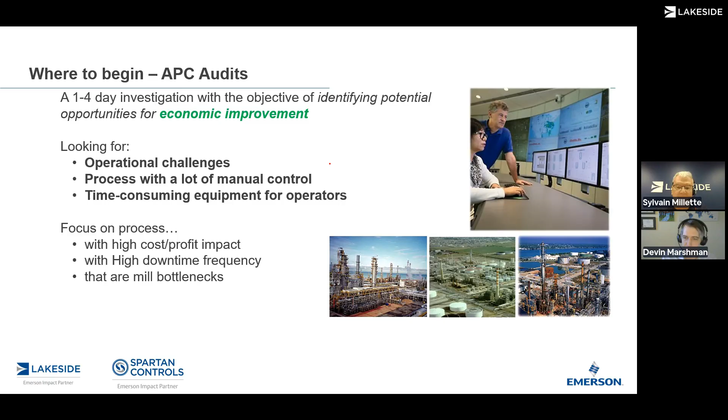And don't forget, on top of that, you do have government subsidies to be able to subsidize these studies, to subsidize the implementation, and to maintain this as well. So don't forget that - we got to make sure we get as much money as we can from our government. I said that out loud, didn't I? Yes, I did. That's okay.

So this is really what we're supplying out of those - this sort of cost-benefit informed investment decision information.

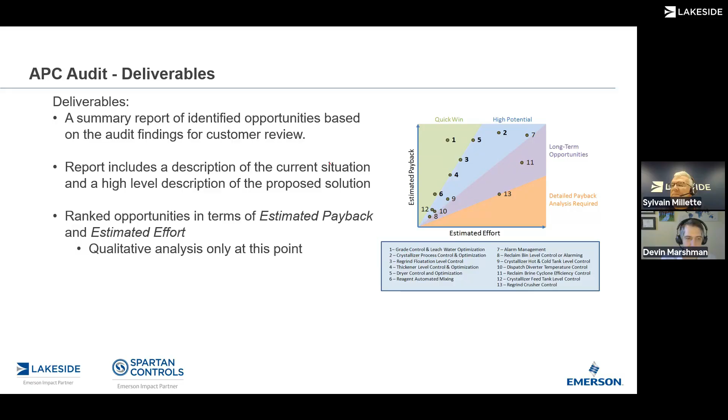It's your bonus. So we do have a few questions here, Devin. One of them is: how many SAG mills in Canada do you estimate have MPC control in place? I'll leave that up to you. Good question, Bill. Hey, Bill.

On the SAG mill specifically, I want to emphasize that it's not MPC, it's IQC actually on there as well. The reason is that it's a lot of override control, and MPC does a great job at steady state, but it doesn't do such a great job at abnormal situation handling, like getting out of overload conditions, or what to do when your feed supply goes for a bit of a walk and you get a whole surge of coarse particle sizes. So we've had a lot more success with IQC, and we have 5 of those up and running in Canada.

Another question: are the MPC and IQC blocks specialized blocks created for the mining application listed in the presentation, or are they just universal blocks for any industry? MPC is a fully supported block created by Emerson that comes standard with DeltaV systems, so it's definitely not specific - any DeltaV DCS has MPC embedded in it. We did not create it; we were just using it for the right applications, which is the thickener in this case. IQC is one that we created just because the functionality wasn't there. Specifically, MPC doesn't do quadratic control, which is what we really needed, so IQC is a quick and easy way to get that done. It's not specific to the mining industry.